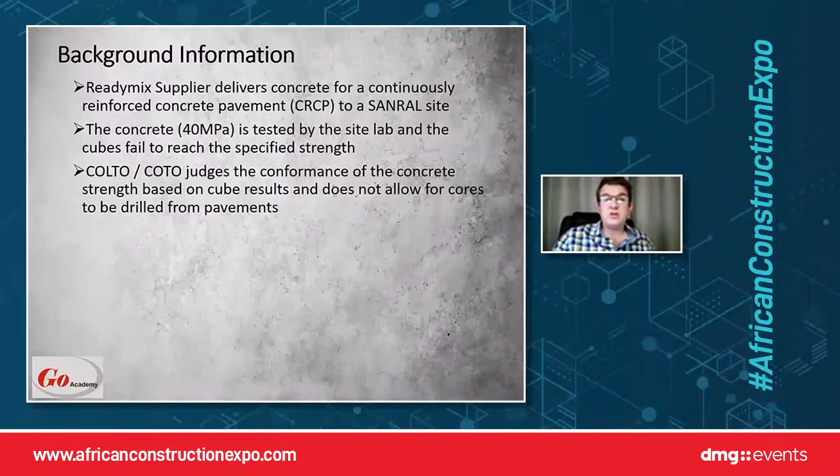Now, I am talking about the COLTO specifications, and I do know that the new COTO specifications have been released for review, but that will only be effective end of March next year. So for the purpose of this presentation, I'm going to focus a little bit more on the COLTO specifications, even though it changed quite a bit recently.

But the COLTO spec, and even the new COTO spec, judges the conformance of concrete strength based solely on the cube results. It does not allow us to drill cores, especially from pavements. We can still get away with drilling cores for structures such as abutments, columns or piers, but for a concrete pavement, there is no allowance in the COLTO specification for us to go and drill cores for full or partial acceptance.

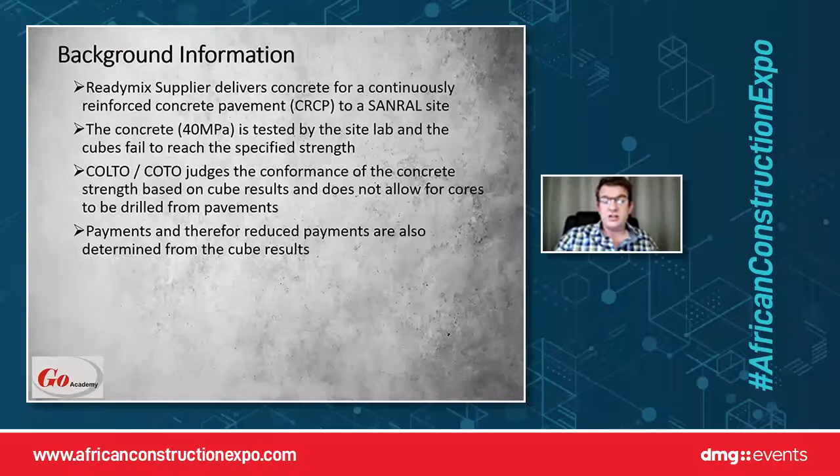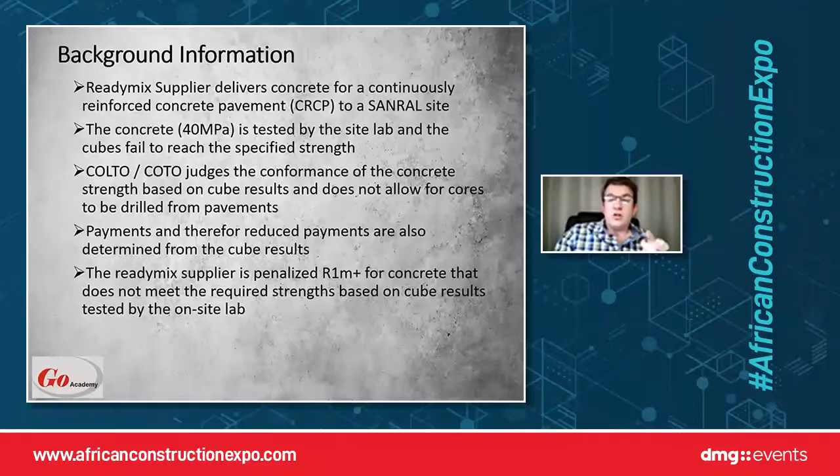So the payments, and also the reduced payments, are determined based on the results we get from the cubes tested by the site laboratory. In this case, as soon as the cubes failed, the ready-mix supplier was penalized more than R1 million for concrete that does not meet the required strength based on the results from the test lab. This was quite a big shock for the guys.

As soon as this happens, we normally go and say, we want to investigate this to see whether there's something we can do about it. Now, SARMA and ASPASA many years ago compiled a list of exclusion clauses for COLTO.

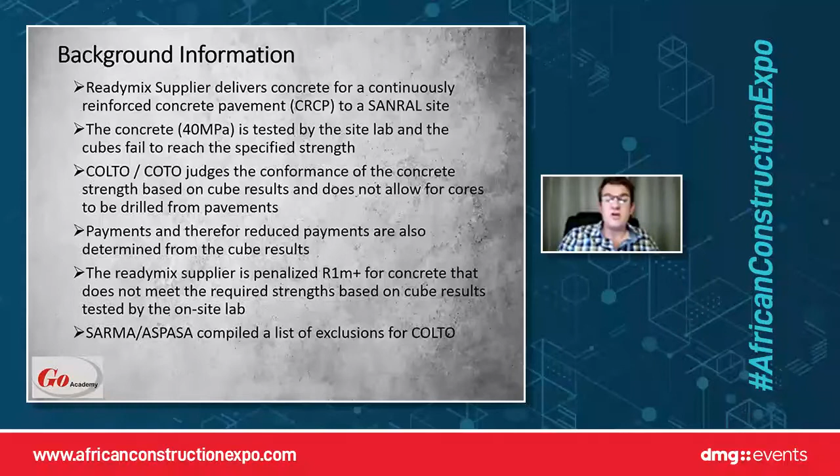It was normally published on the SARMA website. As SARMA has since closed down, the website is not available anymore, but the exclusion clauses for the ready-mix guys are still available, and we'll have a look at it a little bit later in the presentation.

So the site laboratory, in this case, sampled the concrete, made the test specimens on site, and then tested it. But remember one thing: a site laboratory is never SANAS accredited. It is not possible for a site establishment to actually get SANAS accreditation. It has to be a fixed laboratory, one of the main laboratories that can be accredited. The system can be accredited, but the laboratory on site is normally not accredited.

Be careful, because in this specific case, the results that came from the site lab had the SANAS logo on it, which was not allowed to be on the reports, as the laboratory on site was not actually accredited.

The results came in, and we got about 33 to 38 MPa, very consistently in that range, for a 40 MPa specified strength. Now this, as we know, is quite low. The project was then stopped until this issue could be resolved.

But the one thing we need to remember is, as soon as we stop the site and we're not actually proceeding with any of the structures being built, there is standing time that starts to be calculated. I'm sure there's actually physically a guy on site with a stopwatch calculating this. But at the end of the day, every day that this project finishes late, there was a 20,000 Rand a day penalty for late finishing of the project.

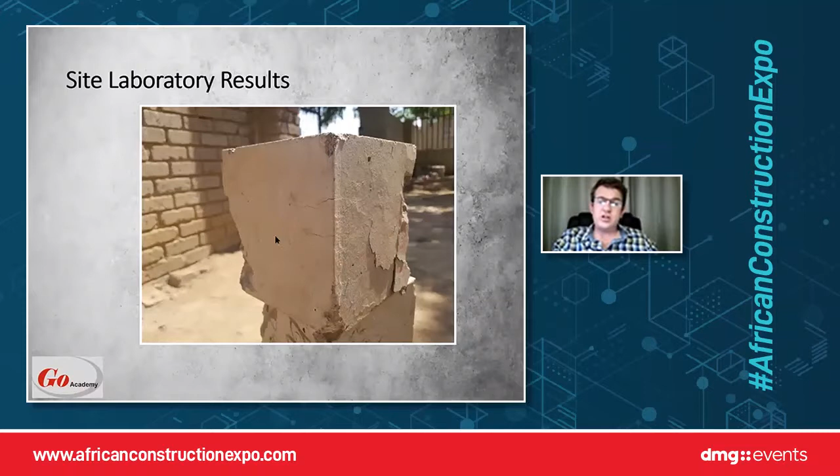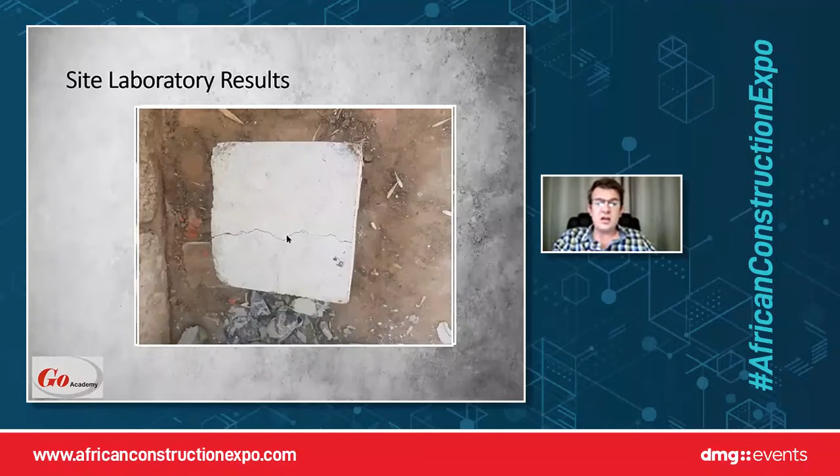Let me show you the cubes that we saw from the stockpile of carcasses. Cube number 1: there you can clearly see a horizontal crack on one side of the cube. The back side was crushed and this side was completely intact. Cube number 2: you can see the horizontal crack inside the concrete. Cube number 3: clear horizontal crack on one side of the cube. Cube number 4: horizontal crack, plain on this side, crushed on the back side.

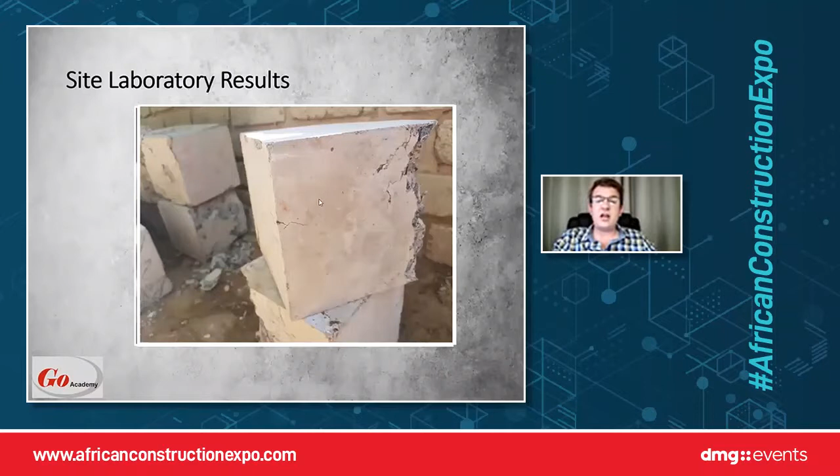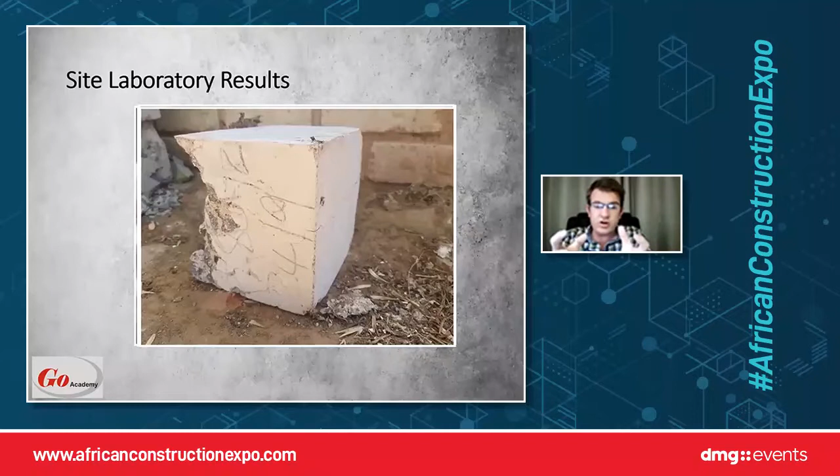I can go through every single photo and show you that the cubes are shouting out that somebody did something wrong. The horizontal crack is a cry for somebody to take attention, to look at it, and see that we are making mistakes. All of the cubes tested by the site laboratory looked exactly the same - incorrect failures. When I get a horizontal crack like that, it physically means my cube was crushed on one side and pulled apart on the other, giving an incorrect failure and a lower result.

Guaranteed, I cannot test concrete stronger than what it is worth. I cannot get a 30 MPa concrete, put it in the press, and get a 40 MPa result. But I can put a 40 MPa cube inside a press, test it incorrectly, and get a 30 MPa result. That can definitely happen. If I don't put it concentrically, if my platen at the top is not loose and I put an eccentric load on my cube, I will get a lower result, as we got in this case.

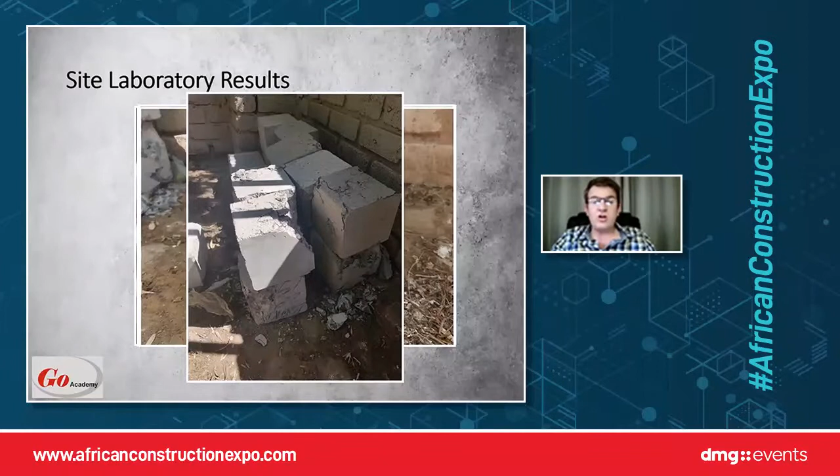I always say, always go and check the crushed cubes. Check the failure patterns. Make sure you've got one of the acceptable, satisfactory failures. All of these failures at the bottom, where we've got an eccentric load, a horizontal crack, breaking on one side or the other, are unsatisfactory, unacceptable failures - which means we got a lower result.

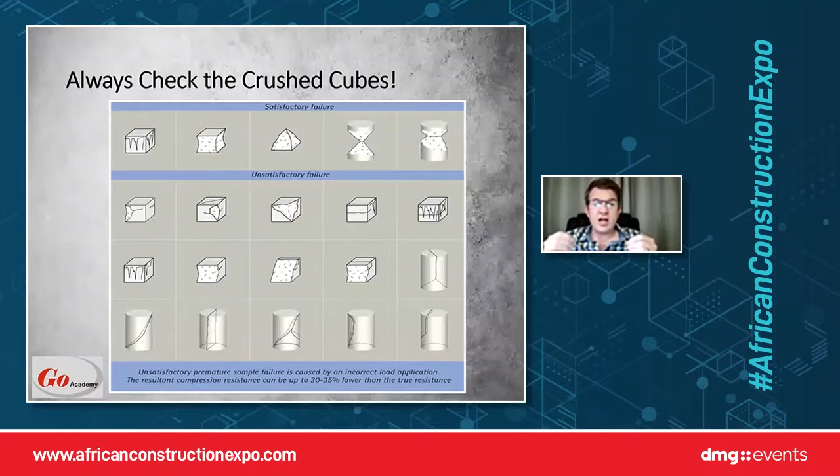But now, what does Colto say in this case? Because now we've got cubes that failed, and a site that is stopped. If you go and have a look - and I underlined this part for you from Colto - it says the resubmission of concrete lots on the basis of cores for full acceptance or even conditional acceptance shall not be allowed. So we cannot drill cores. I cannot go and investigate the slab by drilling a core. The only thing I've got is cube results, but the cube results are flawed.

Luckily, the next paragraph says the engineer may, at his discretion, decide to use the contractor's test results in the judgment plan if he is satisfied that the contractor has complied with all the process control requirements. Luckily, the ready-mix supplier sampled test cubes for every load that went out to site. These test cubes were tested in a SANAS accredited laboratory, and the cubes passed. So we could go and sit down with SANRAL and the engineers, and we could go there with evidence and a possible solution to the problem.

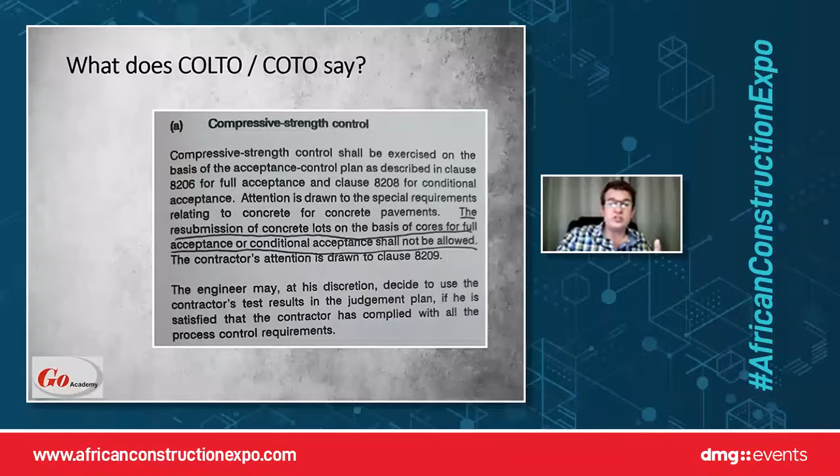Before we get to that solution, let's see what Colto also says about conditional acceptance. For us to get the cubes failed means we can't get full acceptance. For us to get conditional acceptance, it says the engineer may accept the lot conditionally - that is, the lot may be accepted at a reduced payment in lieu of complete rejection. So we can accept it, but there will be a reduced payment. The contractor and the ready-mix supplier are now getting less money for the same concrete, which had nothing wrong with it, but because the cubes failed, they have to accept a reduced payment. And that's unfair.

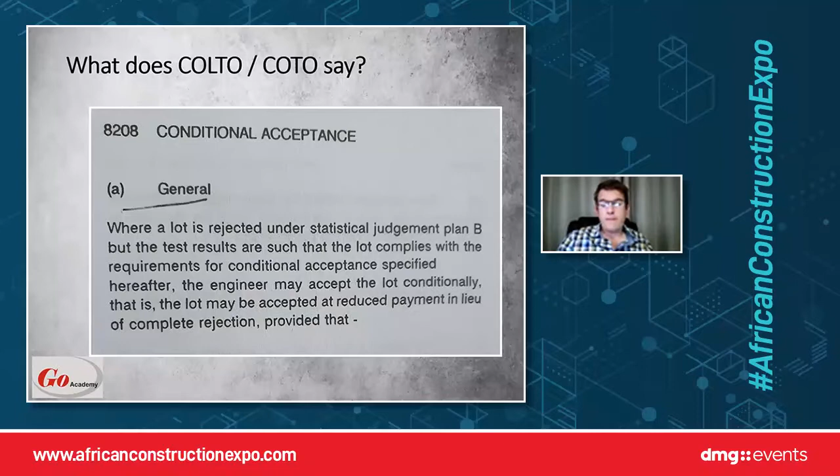It says acceptance will be at the sole discretion of the engineer. The contractor may have the option to remove and reinstate this concrete for full acceptance, but that will be at a massive cost. It's also said that the conditional acceptance and corresponding reduced payment shall apply only in respect of the work and properties listed in subclause 8208B below.

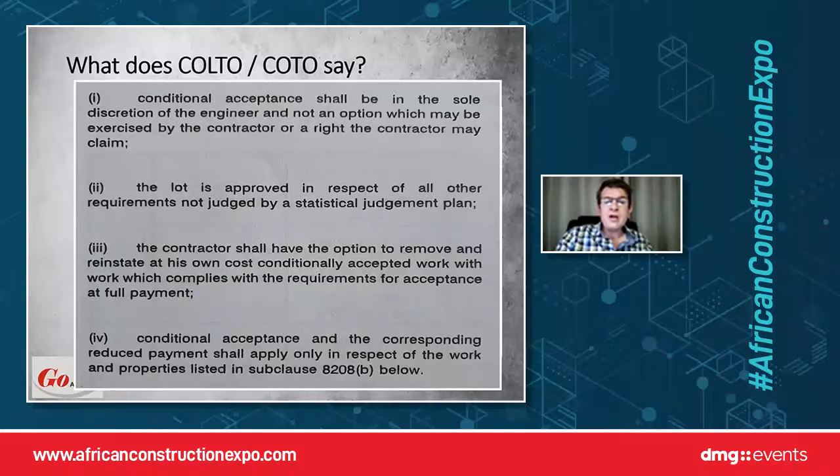So what we did is we went down and sat with SANRAL, the design engineers, the site engineer, the main contractor, and the ready-mix company, and we put all the evidence on the table. We showed them all the results from the lab that cannot be accepted because it was incorrect, so that is all rejected. The only results we've got on the table is cube results from a SANAS accredited laboratory, but it wasn't sampled on site.

In this unique situation, SANRAL allowed us to do core testing on the pavement, but because they were uncertain about how the concrete would perform, yes, we did pick up some design flaws in the pavement as well. The acceptance was, for full acceptance, set at 50 MPa and not 40 MPa anymore.

Conditional acceptance would be at 40 MPa, but at a reduced payment based on the cube results that the site lab tested. But if we wanted full acceptance, the cores had to pass a 50 MPa specification. So the challenge was accepted.

We drilled 114 cores, 38 sets of cores of 3, one set for every single day of concrete being cast on site. We tested it in a SANAS accredited laboratory, and what happened is one of those sets failed to meet the 50 MPa specification. In fact, it failed to meet a 40 MPa specification.

Thank you very much. Good afternoon, everybody. I've got a presentation, I must admit I could possibly speak literally just on the presentation that Jaco has done at this particular point, on some of those aspects as well. But let me go through it in a slightly different approach, and that is how to look at mitigating your material failures and the associated costs. I think Jaco has very clearly laid out just one example of what sort of cost is involved when material goes wrong. And although it's a concrete discussion as such, the same is applicable for asphalt or granular material or anything that is processed on site that comes from a primary or secondary supplier.

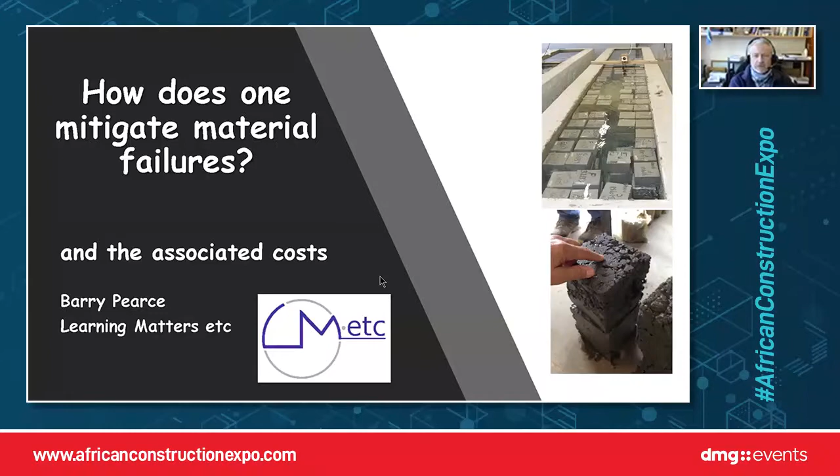So let's have a look at this particular concept and what we're going to look at today. The presentation will cover aspects of in-house testing. As you could see from Jaco's presentation as well, the one thing that actually saved those folk was the fact that the person supplying the concrete had already done their own testing, they'd taken their own samples, and material was then approved based on that particular scenario. So I think in-house testing is critically important.

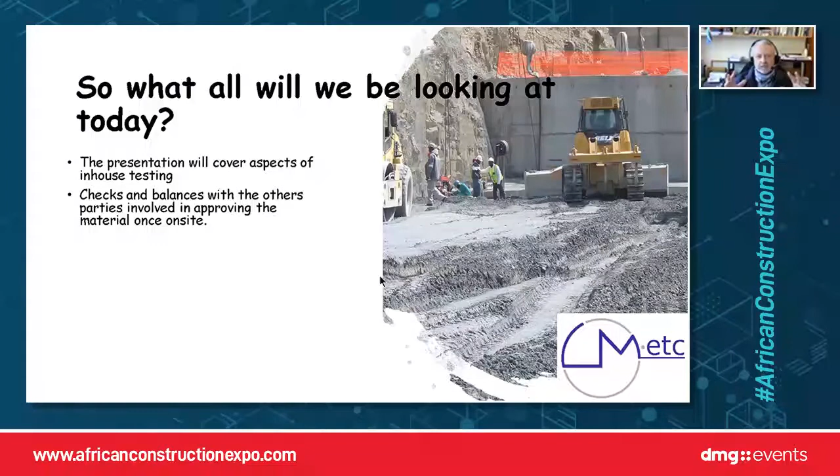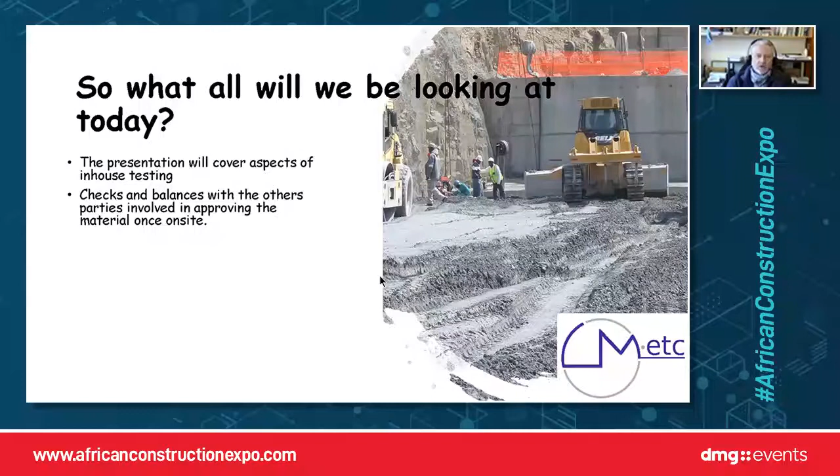Checks and balances on other parties that are involved in approving the material once it arrives on site. It's an issue that lies around the exclusion clauses, particularly when the contractor takes material in its initial form and then manipulates it in some or other way by the adding of cement for stabilized layers, has to compact it. That is not the supplier's issue, that's the contractor's issue. And making a distinction between when is it the contractor's fault and when is it the supplier's fault is something that I think our contracts don't actually take cognizance of.

We'll also have a look at an overview of a basic yet effective in-house quality management system that I believe any supplier should have in place. And then the approval of external testing facilities as well. There is this drive in South Africa for the SANAS accredited laboratories, and I believe it's a good drive. I'm involved in some work with the National Laboratory Association and the civils laboratories, and we've actually done an evaluation on the proficiency testing schemes that we run on an annual basis, of which GoConsult provides the concrete cores, and we've shown that the accredited facilities on aggregates actually provide better and more consistent results than what you would get from the non-accredited facility.

So it does prove that there is value in having SANAS accreditation.

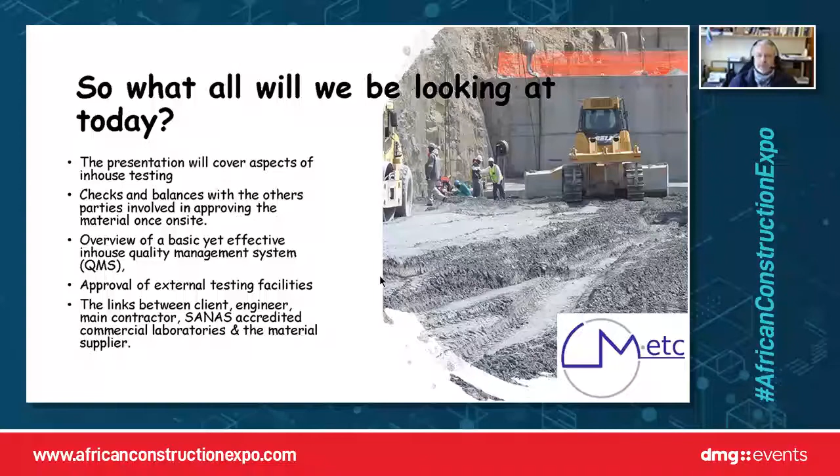I also want to talk about this, and Jaco's presentation also pointed out certain of these aspects, but I'd like to expand on the relationship between the client and the engineer and the main contractor, the SANAS accredited and non-accredited laboratories, and also all the suppliers, whether they are a primary supplier or a secondary supplier. This is actually one of the concrete dams that was produced up in the top of Limpopo.

If you're looking at this type of volume of concrete, producing and laying over 1 million cubes per month in that type of work, and you've got to stop the contract because there's a query over one of the lifts of that particular concrete layer, believe me, it very quickly becomes a hugely expensive exercise. The moment you throw money on the table, the moment you start affecting a person's income in any manner, people get really excited.

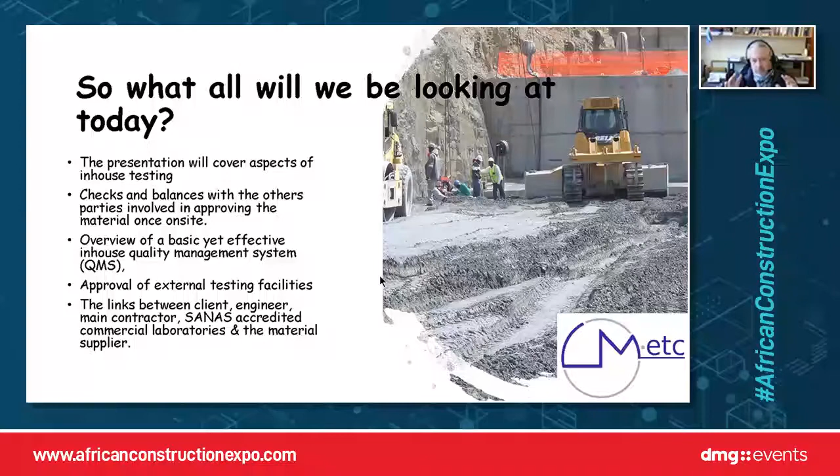Having a look at in-house testing. When I'm talking about in-house testing, I'm talking about the concrete suppliers, the old SARMA members, and the quarries that provide basic materials for the concrete in the form of concrete aggregates. The same thing would happen with your asphalt suppliers, with the asphalt stone, as well as the binder that goes in there. All of these aspects have got to be checked.

If you, as a supplier of material, don't have - and no pun intended - but if you don't have concrete proof of what you have supplied out of your facility, with some form of backup to a SANAS accredited facility, you've got nothing to defend yourself against.

So for me, the very first thing that you need to have at your facility is a testing system that will give you the ability - what I refer to as - to be able to go to sleep at night. You've got to be able to defend yourself with physical proof, lab results, things that are written down in black ink so that it can't be tampered with.

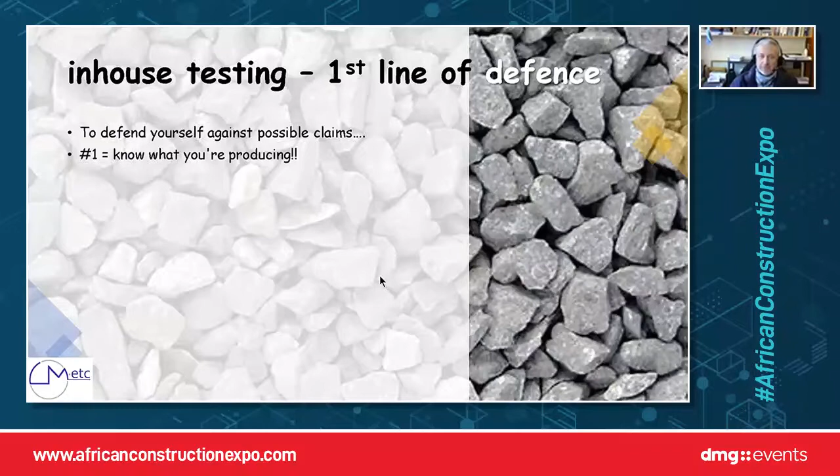The number one thing that you need to know is, what have you produced? Because if you don't know what you've produced, you can't go into a dispute scenario and say, 'oh, but we've been producing this for the last 30 years and we've never had a problem before.' Firstly, I'm pretty sure they'll be able to find that you have had a problem. But secondly, your word doesn't carry weight in a court of law.

Have proof on a daily basis that can be verified. There are a couple of things you need to look at from a verification perspective, which I'll get into a little bit later under the quality management system. But what do you need to look at? You've got to look from a production perspective at your dry grading on your basic materials. Once you've got your dry grading result, you've got an idea of what you've got. It's a relatively quick test, and you can do a number of them during the day. Get that information out to your production guys and make sure that you make the alterations required from time to time.

Your grading, if you're going to be comparing it to a SANAS accredited facility, will have to be the washed grading, and that takes at least a day to complete because of the drying process after you've washed that material, to ensure you're getting an accurate representation of the fine material. You can't compare a dry grading to a wet grading - if that's what you're trying to do, you're actually starting off on the wrong foot immediately.

The other thing, one of the basic tests you've got to look at, is flakiness. Flakiness will be applicable on your granular materials for your crushed base courses and some of the higher quality sub-bases. But you've also got to have a look at that flakiness for your concrete stone and also for your asphalt stone. So make sure that you run those basic tests.

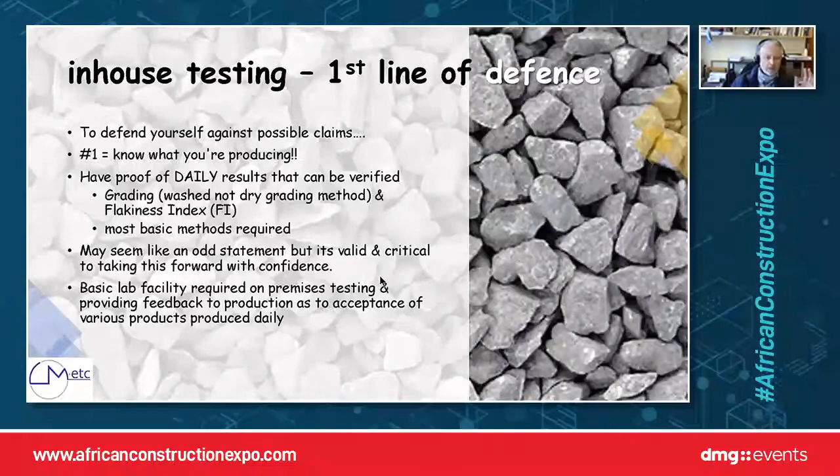Basic test facilities are required on premises for testing and providing feedback to production on the acceptance of the various products produced daily. It doesn't help in a quarry type environment to take a sample, send it to a SANAS accredited laboratory, and wait 3, 4, 5 or maybe even 7 days for the result, if the facility is really busy.

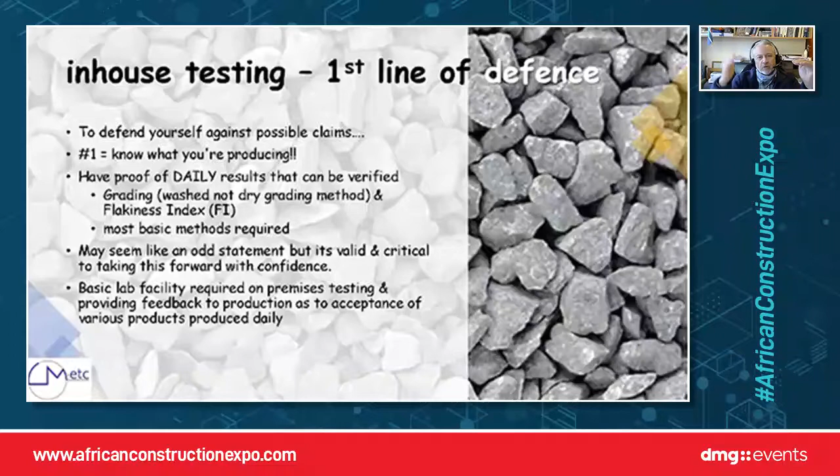Because what has happened during your production in those 3 to 5 days? If the test result comes back and says your material is too coarse or too fine, all the stuff you've produced over that period is effectively out of spec. What are you going to do with it? You spent the money producing it at a certain level, but now you've got to sell it at a lower level. You're going to be making less money. It doesn't make logical sense.

Your in-house testing versus commercial testing: a sample sent to a commercial facility is going to take a while before you get a result back. So you need to actually have a sense of what's going on day for day within your facility.

Dry grading will give you that indication if you can compare where you lie with regards to your dry gradings in relation to what you know you get with your wash gradings. If you're doing that in-house yourself, by the following day you'd have a clear indication of how your dry grading compared to the wash grading and whether you're still within spec, because remember, the spec is not based on a dry grading for production, it's based on the washed grading.

Should this result reflect a failure, what then? All that material that's out of spec, you can sell it at a lower price, but it doesn't make sense putting all that effort into producing good quality material and then having to sell it at a lower price because it's not actually hitting the spec that you require.

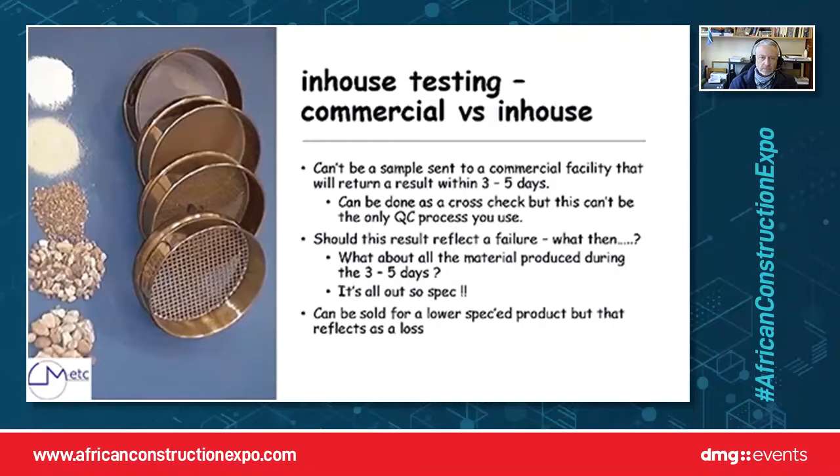What is the value of having a laboratory on your facility? You must not undervalue the benefits of such a facility. Yes, you're going to spend a bit of money on it, depending on how detailed you want the testing and the extent of it, and it's going to cost you slightly more, but the basic test methods of grading and flakiness are not going to set you back millions of rands.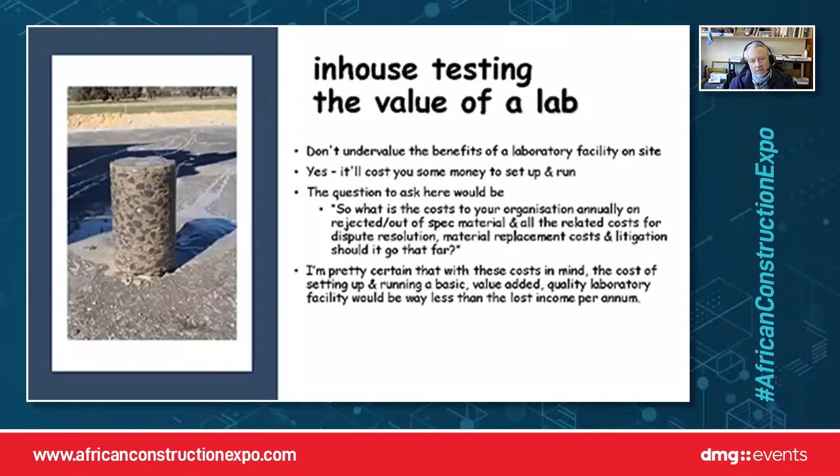I'm pretty certain that if you take the cost of your failures per year and work out the running cost to establish a basic laboratory within your facility, whether you're a primary ASPASA type member or a concrete organization producing ready mix concrete, the cost of the failures you can prevent will way cover the expense of setting up a laboratory. It's going to be considerably lower than what you'd be expending on those types of things. In fact, if you make just one saving on material that would otherwise be rejected, it will cover the cost of your laboratory plus a lot more within a year.

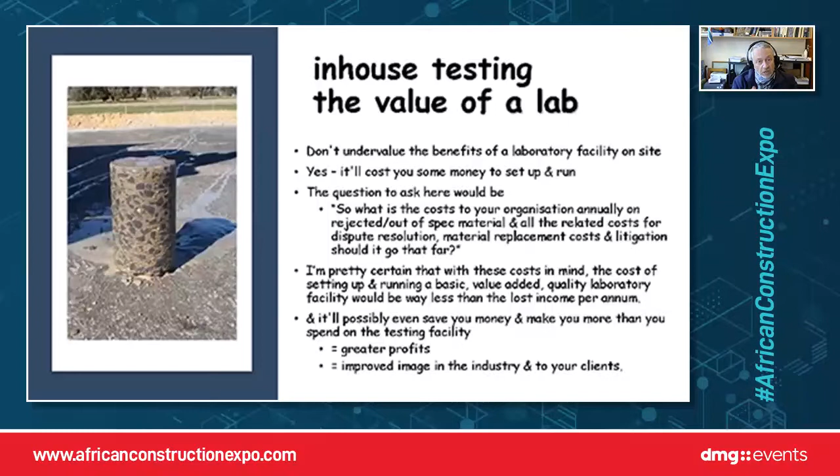And it's possible even to save money, you can make more than you spent on the testing facility, and people will end up with greater profit. On top of that, the drive through ASPASA is to improve the image of ASPASA members by ensuring they have a better understanding of what they're actually producing, so that when they send a product out, they're not sending out something they know is going to fail, they're sending out something they're confident is actually going to conform to the specification.

There's a drive that we've done as well within ASPASA. Unfortunately, COVID shot that thing a little bit in the foot at the beginning of this year because it was just about to roll out. And those are technical audits.

Audits that have been put in place are based on SANAS accreditation's process of 17025. There are basic things we want to look at. We don't expect laboratories doing gradings of flakiness to go the full hog of getting accredited through 17025, but there are certain things you need to look at doing to make sure you're comfortable that the result you're producing is actually making sense. What is 17025? It's basically 9001 for laboratories. It's got a whole lot of technical aspects, not just a paper trail from a management perspective like 9001 has.

First thing you need to look at: make sure the personnel you're using are adequately trained and competent to do the testing produced in your laboratory. Make sure the equipment you're using is calibrated, and that calibration certificate needs to be done by a facility accredited through SANAS. So it's also a 17025 calibrated certificate that shows traceability back to a national and international standard, so there's no dispute over whether that apparatus is measuring correctly or not.

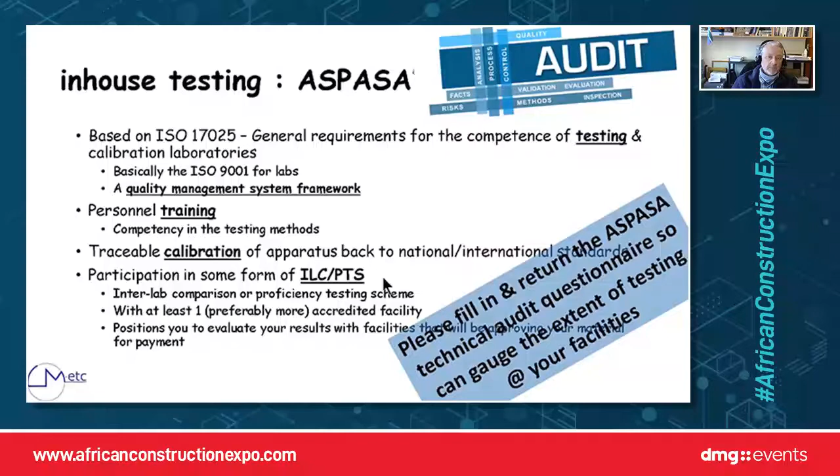Approval of external testing facilities. If you're going to use an external facility to provide critical information on the quality of the material you're producing against the specification, check your lab results against theirs. Build confidence in their ability to provide an acceptable result. Once you're confident in the results you're providing, you can cut down on that external usage where you're paying for the service, because you're confident in your own results.

You just keep checking with them every so often at an acceptable risk level, so you know you're still happy that what you're testing gives you good results matching an accredited facility. It also builds a level of trust in their results and improves confidence in what you're actually producing. Make sure you're using the same method.

There's a dry grading method and a wash grading method. Don't try to compare those results with one another, because they'll give you vastly different, non-comparable results. Make sure you're also conducting the test in the same manner - using the same method, similar equipment that is calibrated, and staff that is properly trained to do that testing.

It can't be another branch from the same company, because if the same training program is in place, whatever error one person gets trained in incorrectly, the other person will have that same error. You need to be able to find out those errors. As mentioned before, unless you're able to determine what those built-in errors are, you're not going to see them.

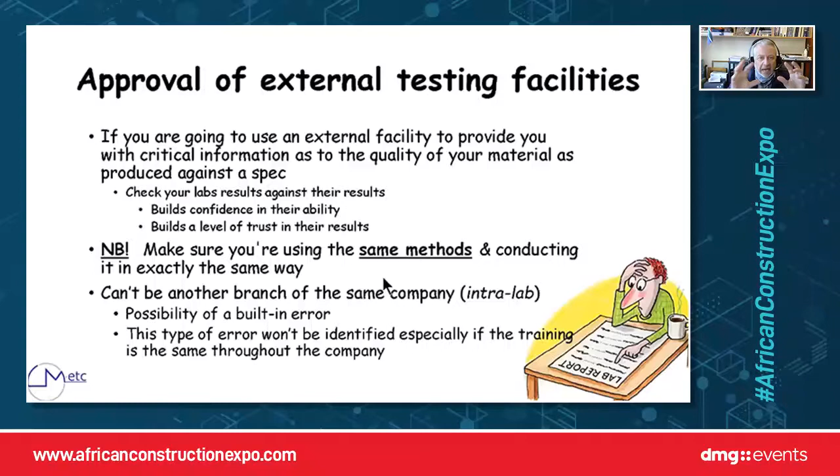Let's have a look at some of the links with the other parties. I'm heavily involved in laboratories and the setting up of the SANS 3001 test methods. I'm equally passionate about ensuring that labs produce results that are not disputed. An engineer is nothing without a test result, because the engineer makes decisions based on whether it conforms to the spec, and conforming to the spec is based on a test result. Remember that link, because it's vitally important.

So who are these other guys? There's the client - that's the oke with the money. There's the consulting engineer, the main contractors, SANAS and non-accredited commercial facilities and laboratories, and then the primary and secondary suppliers - which a lot of the time would be from the concrete audience we're sitting with, the old SARMA members, and the suppliers of that, which are closely linked to the ASPASA side of things.

At the start of a contract, I believe it is absolutely critical for all of these parties to agree on how will we sample, who will sample, and how often, the frequency of that testing. What will be done when there's a failure? Discuss this at the beginning of the contract.

It sounds a bit negative, but agree before there's an issue on money. How are we going to do this when there's a failure? Who's the alternative laboratory or laboratories we will use if there's a failure? So all of that is in place. When there is a failure, when there is a dispute, that information is automatically in place.

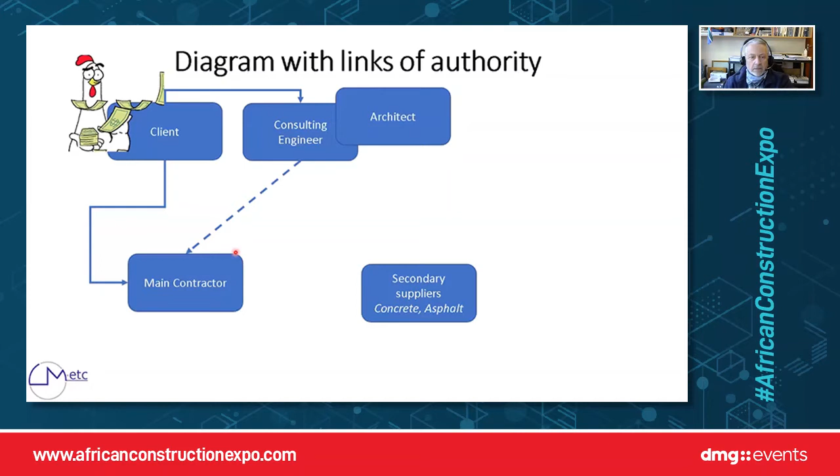Then there's the agreement between the client and the main contractor. There's a link between the consulting engineers and the main contractors because they're basically the client's eyes and ears, and knowledgeable—in inverted commas—with regards to what the client actually wants and the construction processes and practices.

The next folk that sit in on that particular scenario are the people that have provided prices to the main contractors, in the form of secondary suppliers, contractors, concrete and asphalt, and then your ASPASA members as the primary suppliers for that base material, also coming in here to the main contractors. There is no link to the consulting engineers and the client in this regard, and they often don't want to get involved in any issues around who that supplier is.

They will want to talk to the guy they've got a contract with, and that is the main contractor, and that's problematic.

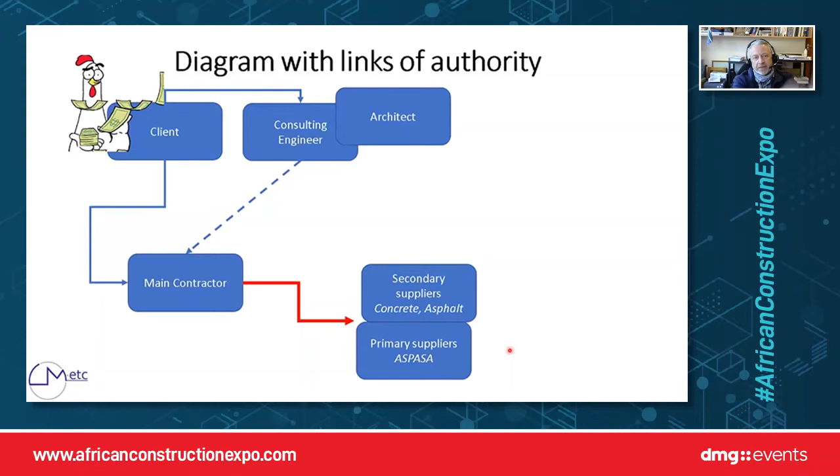The other group in this environment are the laboratories, whether they're accredited or non-accredited, and there are a couple of links here. The consulting engineer will have a lab on site, and as Jaco said, they are currently not accredited through SANAS, although their head office would be.

The new drive is that any contract under SANRAL which is going to extend for longer than a period of two years, those site laboratories are going to have to go through the 17025 accreditation process, which I believe is a good thing. The problem will still lie, of course, with those maintenance contracts that are shorter than two years, because it just becomes physically impossible logistically to get them accredited.

So there is a little bit of light at the end of the tunnel around labs on site on the big contracts, which are going to have to become accredited, and I think that's going to sort out a couple of the issues.

There is also a link between the main contractor and the laboratory. The main contractor might even have their own laboratory, and whether that's accredited or not obviously starts becoming a little bit more muddy in the water.

And then in some cases, even the client will have a laboratory, or have a fair understanding of what's required within a laboratory because of who they happen to be. That would typically be one of your larger clients, provincial administrations, and of course SANRAL, the National Roads Agency. So the fact that there's no link between your client here for the base material, and in some cases with regards to that particular laboratory, becomes problematic.

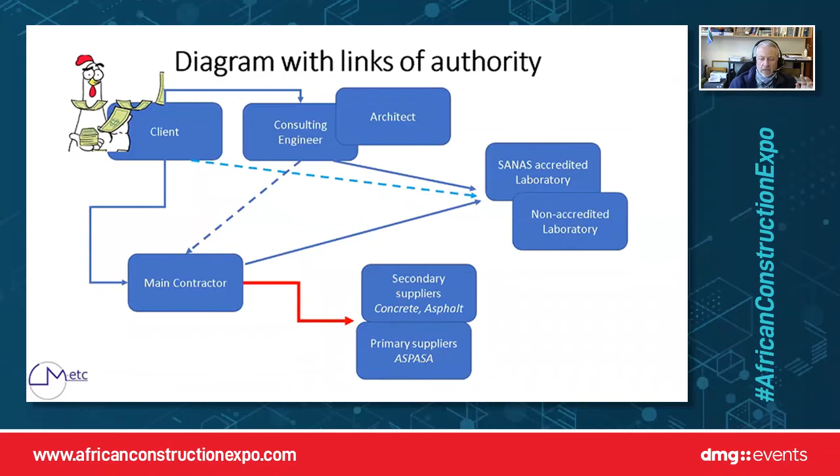Let's have a look at some of these other scenarios that we're dealing with, with a client. It's going to sound a little bit harsh, but I think I'd rather go a little bit overboard with my criticism to make the people sit up and actually realize where the issues actually lie.

Basically, the client just wants the final product. They've got a spec, they've got a tendered rate, and they're saying, that's what I want. I'm not interested in how it gets there or whatever—I want the final road built in a particular manner, or bridge, or structure.

The problem is South Africa allows a tenderer to come in and accepts that tender on the lowest price, and I believe that is fatally flawed, because everybody's fighting for that lowest price, because they know if they hit that lowest price, they can actually get that tender.

It's possibly even worse at the moment because everybody's now scrambling for work post-COVID. Some of the clients are knowledgeable about testing, but unfortunately, I think the majority of them are not. And that is a major issue.

On the engineering side of things, unfortunately, the engineers are not as knowledgeable about what goes on in a laboratory as what would be liked, or as far as I'm concerned, what is required. If an engineer is making a decision on a test result, if I take Jaco's case and look at the way those cubes were breaking, the engineer should have seen the cubes were breaking wrong. He should have stepped in immediately and made the correction, besides the fact that I believe the lab should have picked that up as well. So I put the blame on two people's shoulders, the engineer for one, and secondly on the lab side.

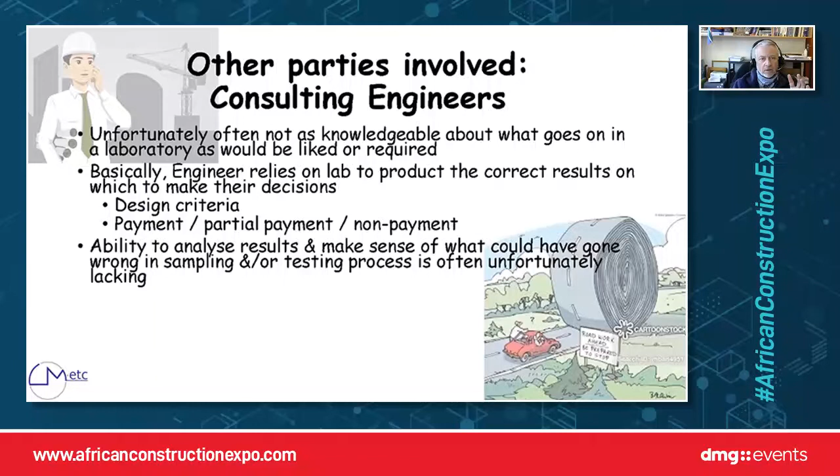The ability to analyze the results and make sense of what could have gone wrong in sampling and or testing is often, unfortunately, lacking. So there's an issue with the engineers because they do not make the right decisions, because they don't understand what's happening in a laboratory.

Too much reliance on the laboratories is made, with too little value placed in the function of the laboratory, where they're often undertrained, underpaid, and undervalued. The engineer should be putting a lot of emphasis on the laboratory because they are the guys that actually give him the information on which he makes his decision. And if he makes a bad decision because he got a bad result and he can't analyze it, he sits there with egg on his face.

The main contractors, they're in the business of making money. Quality, unfortunately, is often second place. If it just passes, they're happy. Pay me the money and I'm out of your hair.

Testing and sampling experience in most cases is limited, especially the representativity of the samples that are picked up on site. I normally say, do not pick up your own samples, leave it to the laboratories. They should have a far better idea of getting a representative sample back into the laboratory for testing.

At the end of the day, what does the contractor want? The contractor wants the result that passes. End of story. The result passes, he gets paid, everyone's happy. The driver is profit, not quality, unfortunately.

From the commercial facilities, that's both accredited and non-accredited facilities. As Jaco mentioned, currently none of the site laboratories are accredited, unless all the testing is going back to a head office facility, and that's possibly something that's misunderstood. I don't believe the laboratories currently are seen and valued for the critical function they perform. They tell the engineer, basically, yes or no.

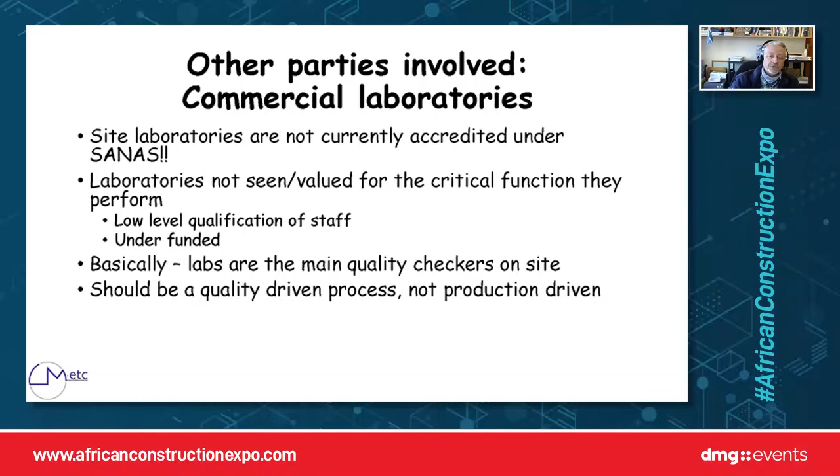Basically, the lab is the main quality checker on site. They are the facility that gives payment or rejects payment based on the results that they produce. Your lab facility has to be quality produced, quality driven. It cannot be production driven. You can't run a test quicker than a particular procedure, there's a limited minimum time that you can do, you can't do a test method quicker. If you've got less staff members in the lab than what you actually need because you're trying to save money, you are going to make mistakes in that laboratory.

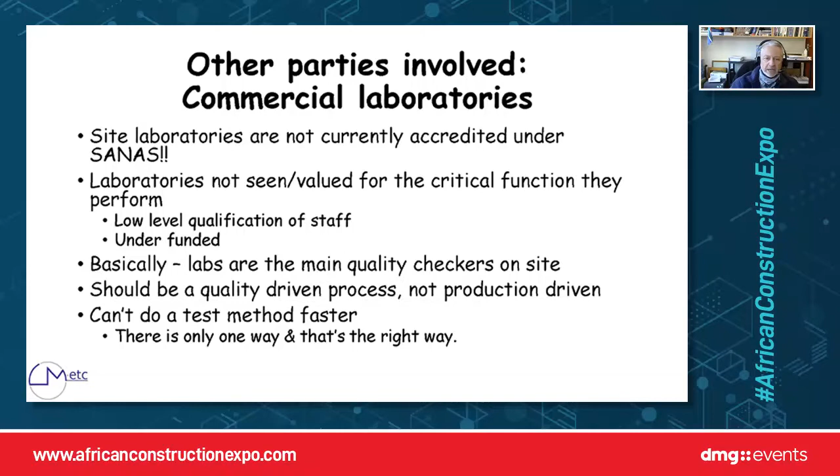So around the laboratory side of things, are there issues in the testing facilities? Absolutely. Are we better off than we were 10 years ago? I believe we actually are. Is there still work to be done? Absolutely, and this is all hinged around the laboratory side of things. What I need to ensure is that everybody has their eyes on the labs, keeps them in line, so that everybody can save money on the unnecessary material claims and disputes that actually occur.

On the SANAS website, for those SANAS accredited laboratories, there's a complaints tab you can actually click on. I've had a discussion with SANAS recently, and they're going to put a notification up there to say, if you do put a complaint up there, it's actually going to be treated as anonymous.

Therefore there's no dispute or come back to your particular facility. The idea would be with those types of complaints, we want to pick up the trends. What are the main issues being dealt with? Because if a certain trend is being picked up on a regular basis, we can then look at addressing that issue.

Through SANAS and through the NLA and other organizations like ASPASA. The other thing is SANAS needs to get to the point where they've actually got a couple of teeth in their mouth, that if there's an issue with a particular facility, they need to start suspending those facilities, or at the very least, suspend that particular test method out of their schedule of accreditation.